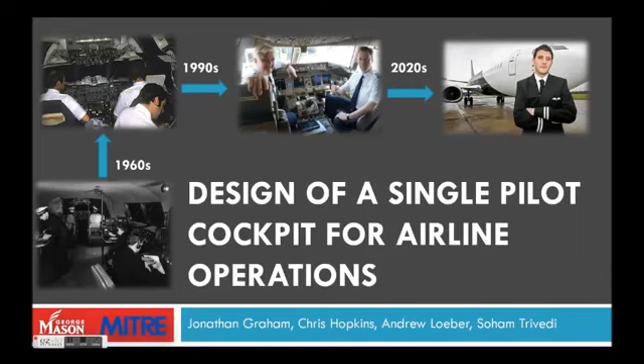I will be doing a quick little overview of our senior capstone project, which is the design of a single pilot cockpit for airline operations. My teammates were Chris Hopkins, Andrew Loeber, and Soham Trivedi.

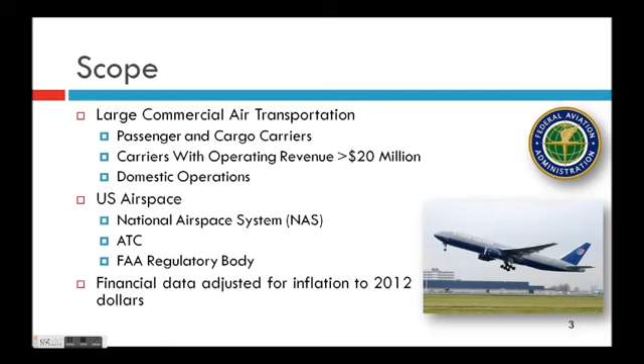So start off with some context. Our scope that we're looking at for this research is large commercial air transportation, which we take from how the Bureau of Transportation Statistics defines it: carriers that have more than $20 million in operating revenue, and domestic operations, so it's the U.S. airspace, and we inflation adjust all of our dollar figures to 2012 dollars.

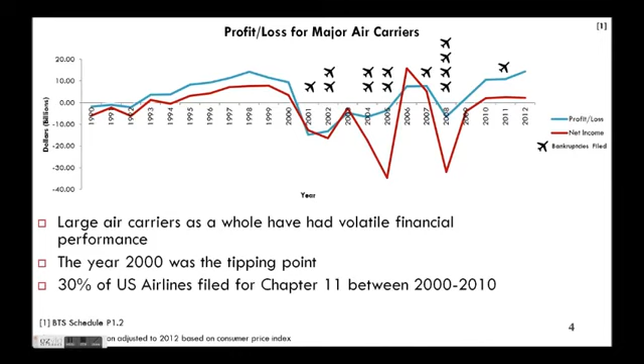So this graph here shows our profit and loss for major carriers. Notice that up until about 2000, they were somewhat profitable, and then there's this period of bankruptcies and really up and down in profit and loss and net income. So overall, pretty unstable during this most recent period.

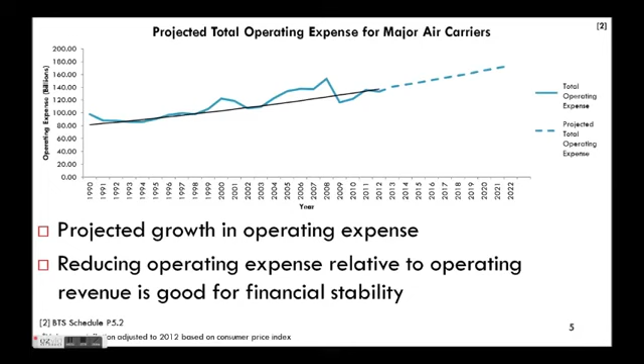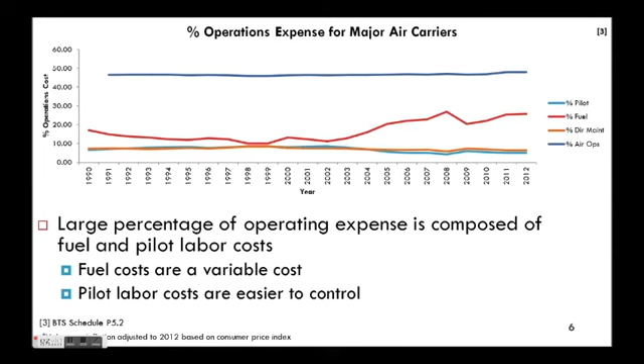And when you look at the operating expense, it's steadily rising here over the period 1990 to 2012, and then projected to keep going. And of that operating expense, fuel really was the driver over the last decade. For our purposes, we're saying that fuel costs are definitely more challenging to control than something like labor. So we are going to focus on labor. And pilot labor, though steady, was still a pretty large portion of that $100 billion or so operating expense.

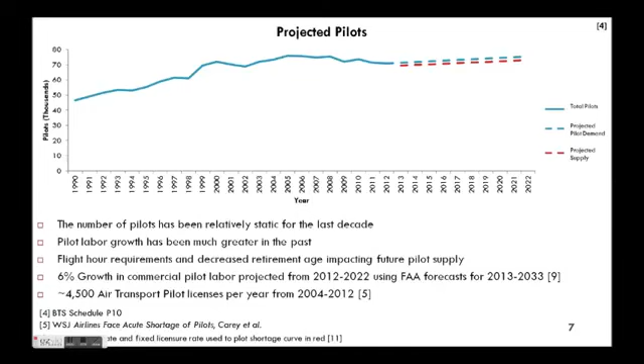In addition to that cost figure is the fact that, according to FAA and some other reporting, there's an expected pilot shortage in this commercial area. So you're having cost issues, and you also might have a pilot shortage, so that drives looking at a single pilot cockpit.

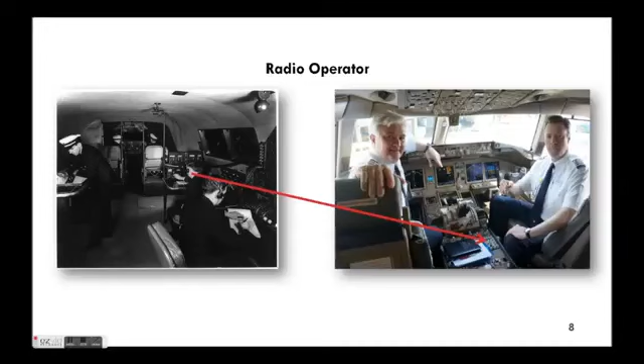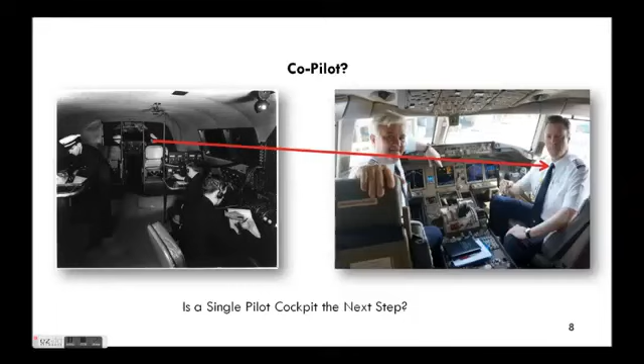Now on this slide, an interesting historical note is the historical evolution. So on the left, you start with 5 pilots, and then over time, certain technologies eliminate the need for a pilot. So the radio operator goes, and then the navigator, the flight engineer, and now we're going to say, can we get rid of a co-pilot? Is there some technology, or is the safety of the aircraft good enough, or whatever the case is, where you can have a single pilot?

So our focus is going to be on the flight deck, and we isolate the 2 roles of these 2 pilots, where you have a pilot flying and a pilot not flying, also as a captain and a co-pilot. Though pilot flying and pilot not flying are interchangeable, they're not static. And in general, due to flight requirements for certification by the FAA, you have to really balance these 2 roles between the co-pilot and captain. Otherwise, no one would ever really get trained.

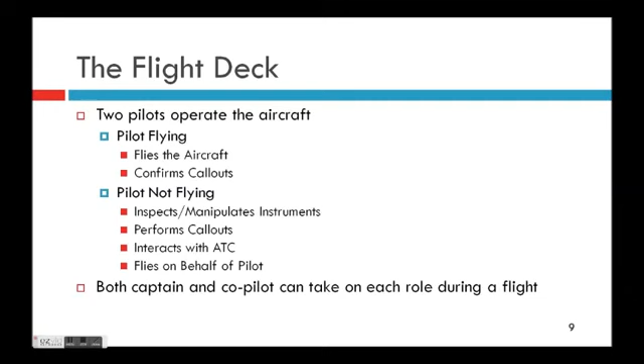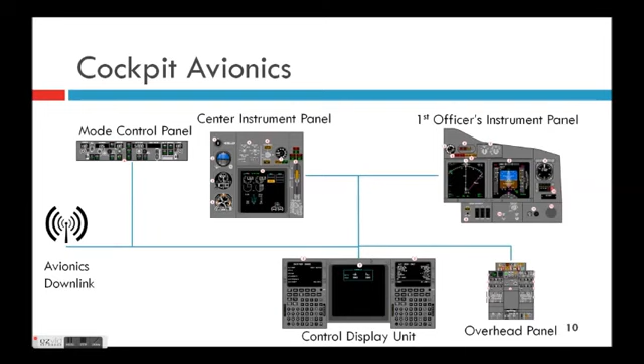Also to note, yes, there are more than 2 pilots in certain aircraft. Usually, that's the international flights, the larger planes where you actually have to have a rotating crew. That's out of our scope. Again, we're in the U.S. airspace. Looking at some of the cockpit avionics that are common, these are some of the technologies that eliminate the need for certain pilots.

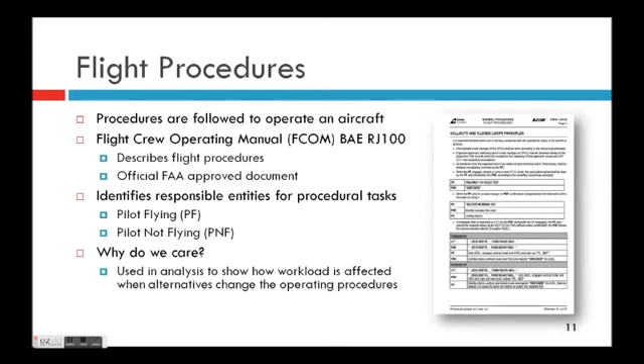And what's governing these pilots in the cockpit are the flight procedures. For our purposes, we were able to obtain a BAE RJ100 flight crew operating manual, which has a section that tells all the standard operating procedures that a pilot flying and a pilot not flying are supposed to do. And for our analysis, we're going to look at how workload is affected whenever these procedures change under different system designs.

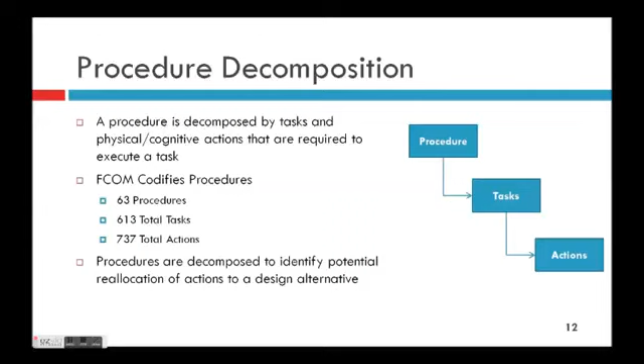So a procedure, as defined in that operating manual, is broken up into 63 different distinct procedures, and those are normal and abnormal procedures, which are then decomposed into 613 tasks, which we decompose further into specific actions, which characterize physical and mental actions that are required to accomplish that hierarchy of procedure tasks.

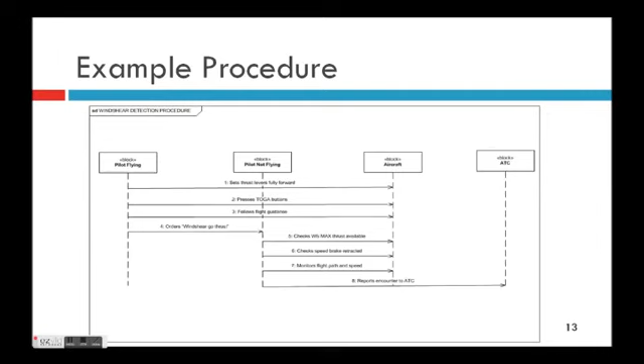So these terms I'm using, the instrument manipulation, cockpit call out, these are our ontology that was developed to characterize these actions, so the lowest level interaction in the cockpit for our purposes.

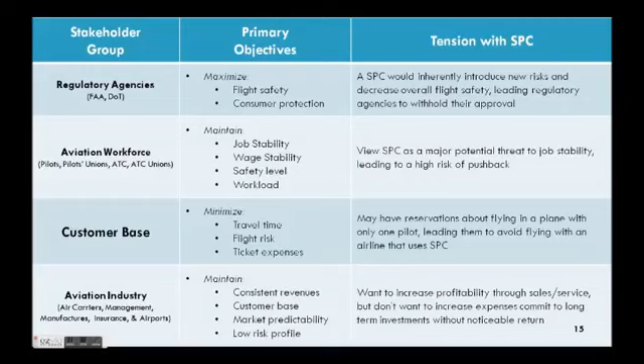So going on in the stakeholder analysis, we've kind of grouped some of these various high-level stakeholder groups. So you have regulatory agencies like the FAA, the aviation workforce, so pilot unions, air traffic control, their unions, the customer base, and then the aviation industry as a whole. So air carriers, the management of those air carriers, or airliners, if you will, manufacturers of the aircraft, insurance, airports, etc. And this nice graphic here to kind of describe some of those tensions that you have.

So regulatory agencies would be pretty hesitant to transition such a large overhaul in the air system to go from these 2-3 pilot cockpits down to 1. And then pilots, of course, would be a little miffed at first because you might have issues with perceived job threats, things like that. But again, there's a pilot shortage, so there might be win-win there. Pilot unions, ALPA, the air traffic controllers, and their unions. Again, these kind of labor groups resistant to change.

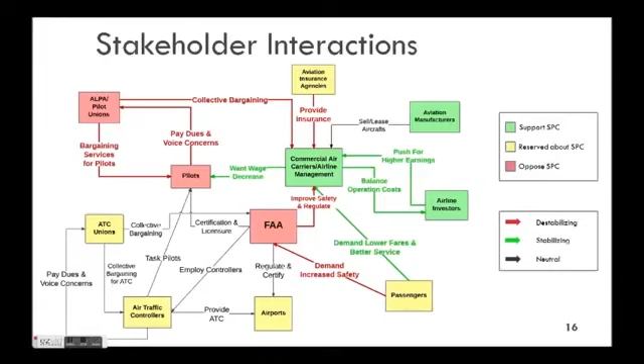Your commercial air carriers, airline management, and your aviation industry overall might be willing to support something like a single pilot cockpit due to the potential market benefits for reduced cost, increased sales for planes, things of that nature. Of course, there is a risk profile associated with that, so you got to get regulatory and of course insurance companies, things like that on board too. So a lot of tensions going on, but that will be addressed later with a win-win.

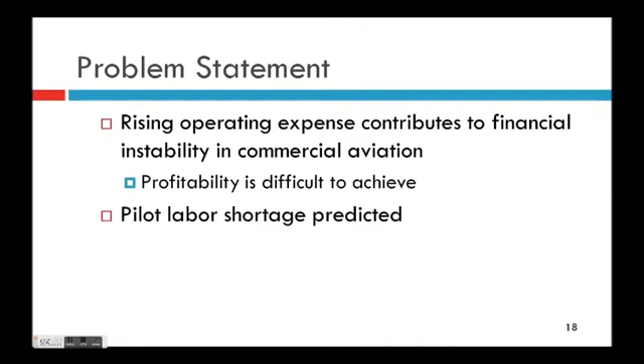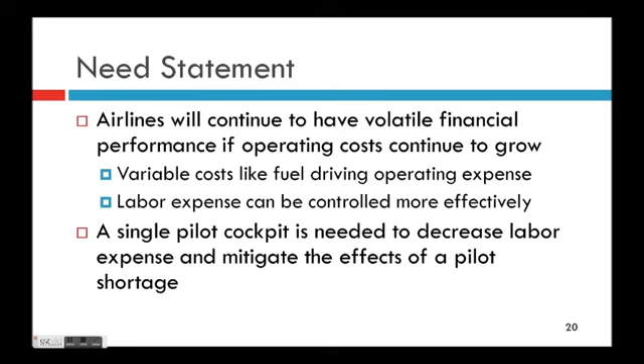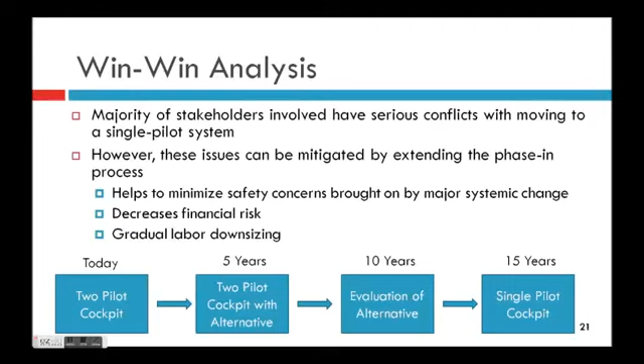So there's a lot ahead of you with trying to satisfy all these different stakeholders, and a win-win could possibly be the actual phase-in of this technology versus just like a light switch, you go from 2 to 1. So notionally here we have a 2-pilot cockpit as we have today, and then within 5 years you have some sort of 2-pilot cockpit with your alternative. So you keep those 2 pilots there to evaluate it, and you keep evaluating, testing, refining, so very iterative, and then you eventually transition to a single pilot cockpit. So this gives you a lot of time to analyze and satisfy a lot of these issues that these stakeholders would have.

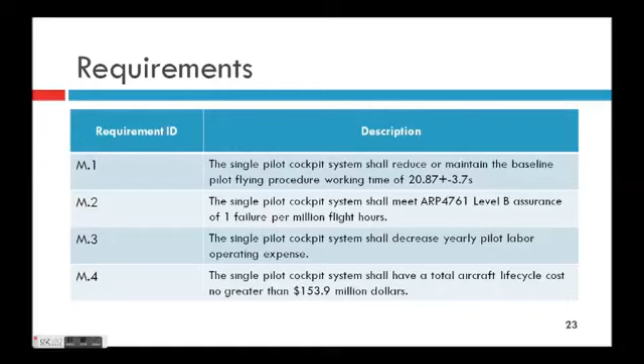Some high-level mission requirements we've developed were for the procedure time, so we're going to put a boundary on their baseline procedure time. Reliability requirements and costs, so you're concerned about safety, and then these values come from our analysis, which will be described further later. So into the design alternatives, first we'll start with the physical process diagram.

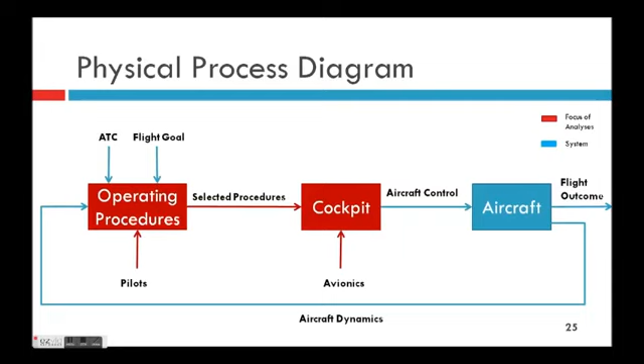This is kind of where we branch our design alternatives from. And we start with operating procedures, which have pilots that are kind of triggering these, or not triggering, these are mechanisms for the triggered flight goal and air traffic control. So they're receiving commands and they're trying to hit a target goal, and they're selecting these procedures and implementing them within the cockpit, which are your avionics, and then they're issuing aircraft control to the actual aircraft. And you obtain your outcome, or you have that feedback loop with that aircraft dynamics, and you just keep doing this. So again, it's kind of a steady state here.

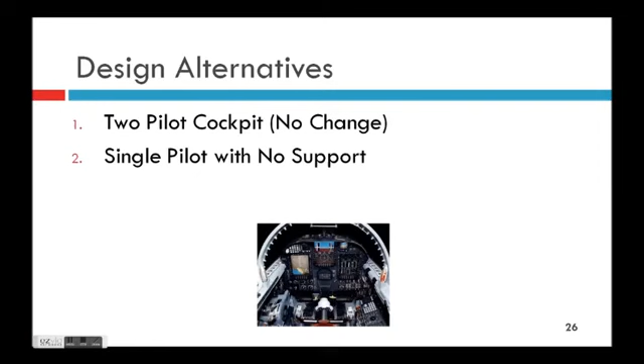In our design alternatives, we'll have basic 2-pilot, so this is the no change option. We just keep everything the way it is. Single pilot with no support, so it's just a lone guy flying. That's a picture of a U-2 cockpit, so very common in the military, but we'd be trying to do this

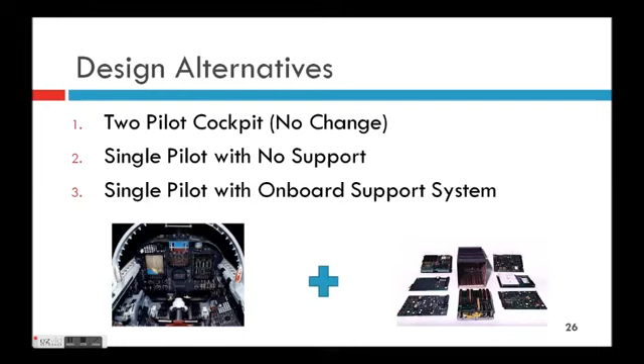for commercial. And then a single pilot with onboard support system, so that is that single pilot who's flying, but he has some sort of avionics hardware. Black box at this level, but it's there and it has some basic functionality that can handle some of the workload that the co-pilot would have, or the pilot not flying would have.

And there's three different models that were generated for each alternative. So one for the two pilot, which is basically the manual. And then there were some rules of thumb developed to change how we eliminated some of the procedures for the single pilot case and the single pilot with onboard support system.

And that gets pumped into a Java simulation program, which underneath has a model human processor, which is a queue network of different processing nodes that basically those actions all the way at the lowest level of our model get processed through, which I'll explain more in detail later.

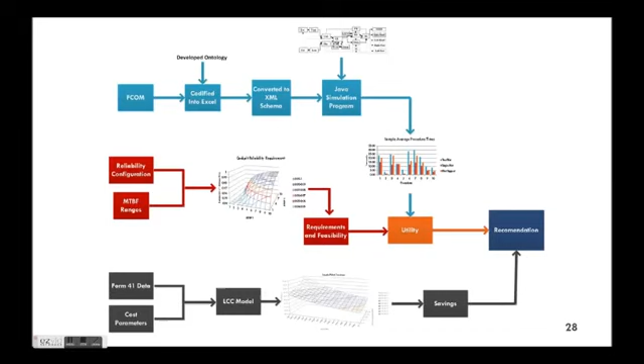And those two inputs get combined into a utility, which will use a lifecycle cost model to develop the savings potential for the alternatives, and then eventually drive for a recommendation.

So start with the procedure simulation, a lot of assumptions here. We start with the model human processor. This is going to approximate our actions in the cockpit under normal flight conditions. So this is best case scenario, no pilot that's fatigued, or he has something on his mind, or whatever, he's in optimal condition. The events are independent of each other, so they're not related in any way. If there's an issue with one, it's not going to carry over to the other.

Normal flight conditions and expert skill level. Presumably pilots have to be experts to fly at a commercial level. They have a lot of flight experience and they have to be certified. And we assume the alternatives follow contemporary avionics costs. So for that onboard support system, it's not going to be absurdly expensive. It should be relative to a similar system of similar complexity.

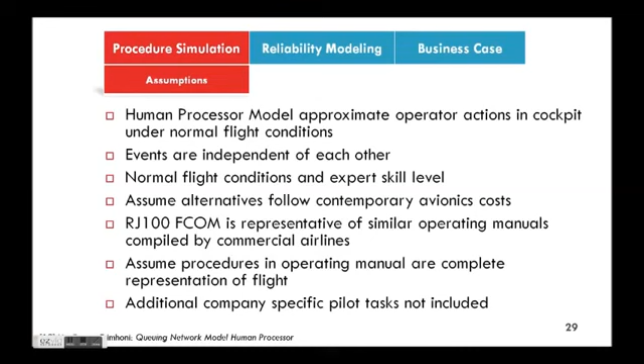The RJ100 is representative of similar operating manuals. Of course, not all of them are the same. If you have a 737 or 757, they're going to be different, but we're going to say that this approximates most of them. And the procedures in these manuals are a complete representation of normal flight. Additional company-specific pilot tasks, which are very common, are not included in the manual, and therefore are not included in the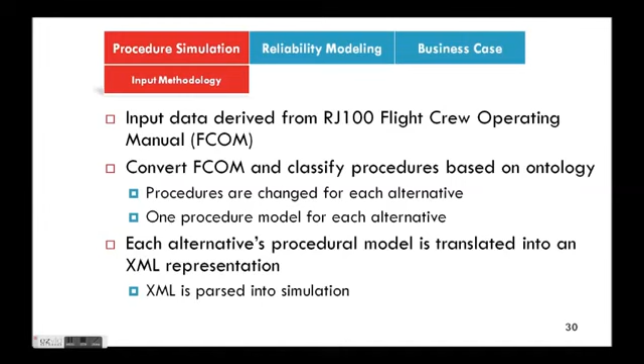analysis. So for inputs, again, driving the point home, we started with that standardized operating manual and then broke it down into this XML model, which gets parsed into the simulation and is processed according to the model human processor, which is a high-level network broken into perception, cognition, and motor, with a lot of sub-network pieces below that that make up some of the ins and outs of each of those higher levels.

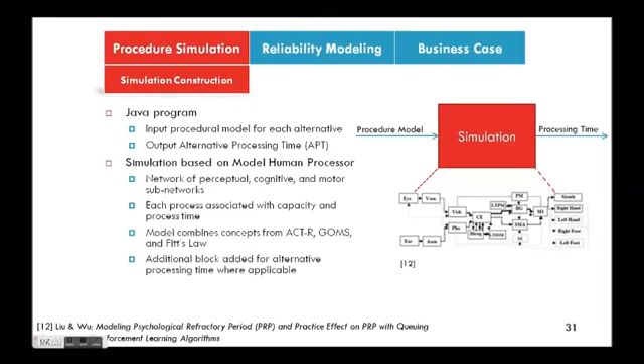So it's grounded in a lot of human factors research. If you're familiar with this area, like ACT-R, GOMS, Fitts' law, a lot of these pieces are placed in there. And we add our own block for a processing time for avionics. And this is just a little mini animation.

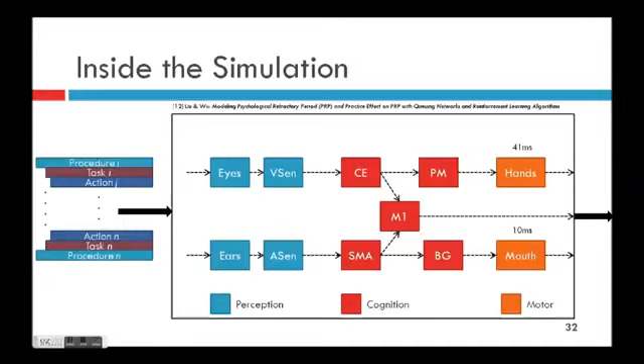So over on the left, you have that tree. That would be the XML. An action comes in and gets processed by the perception, then goes through cognition, and then hits the motor if applicable, for instance, if he's playing with an instrument. And these get summed up, and you'll get an actual processing time for that action, and those actions get summed up to the tasks, and eventually you'll get an actual procedure time.

And these are the equations that are used, so some of various distributions for various sub-network nodes. And then these are just summed up in a Monte Carlo-like fashion, and you'll get a processing time for each procedure.

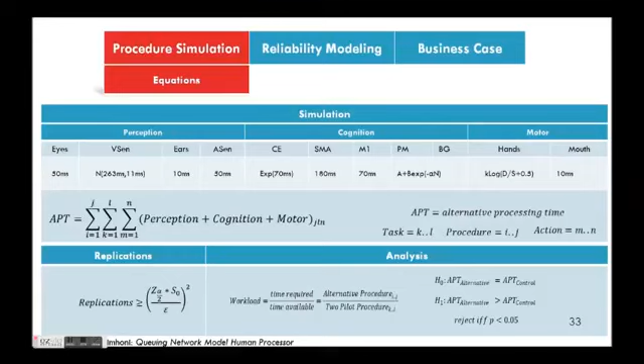And for analysis, we're going to look at if there is a statistical difference in our two-pilot case, and then what's the workload. So workload is a ratio for the procedure, so discrete individual procedure time compared to the two-pilot procedure time. So if it's greater than 1, then it took more time for a single pilot to fly than the two-pilot to fly.

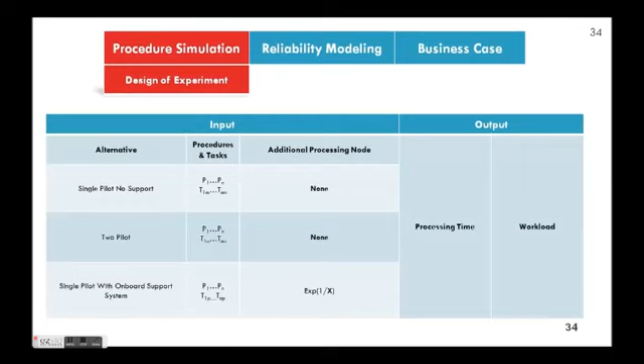In the design of experiment, we have our input, which again are those 3 different models which have different tasks. They're manipulated based on the capabilities of each design alternative. We add an additional processing node for the onboard support system, and then our output will be workload and processing time.

Queuing over to reliability modeling, we looked at what is the baseline safety in the airspace system now. NTSB puts out some data, and based on that, there's about 2.2 accidents a year on average from the 1993 to 2012 time period, with an average of 14 million or so flight hours a year.

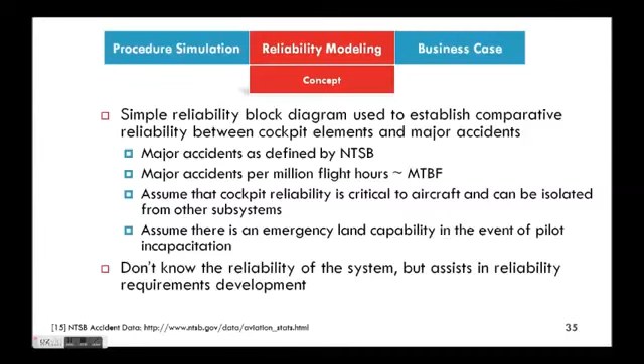And we treat that as a failure rate, so 2.2 on average, 2.2 divided by 14, and you'll get your failure rate, and then we'll convert that to a per hour basis, and then use that in reliability block diagrams to see what happens for basically your space of allowable failure.

So what can you certify to meet a certain reliability requirement, which I might have skipped over in the previous slide, but at 1 million flight hours, which we fix in our analysis, is 0.8674. So there's an 86% chance you can continue flying at 1 million flight hours without actually having an accident in the airspace system. And a major accident is defined as a loss of life or a catastrophic loss of the aircraft hull.

So on the left-hand side, you have a two-pilot cockpit, and in parallel, you have a pilot and a co-pilot. If one is incapacitated, the other can continue to fly the aircraft. And the aircraft is, of course, whatever its piece is in serial with that cockpit. The single pilot, though, if he goes, then it all goes. So it's a serial reliability.

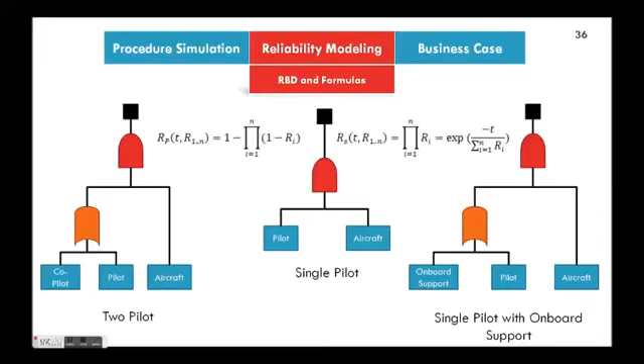The onboard support system, we're going to say that it has a functionality or capability where it can actually support a pilot incapacitation event where there's either a ground trigger or another person on the plane can trigger an emergency auto land or auto transition effect. Again, really high level assumption, but we don't think it's out of the scope of possibility given the current UAS capability with a lot of the military hardware and even civilian hardware at this point.

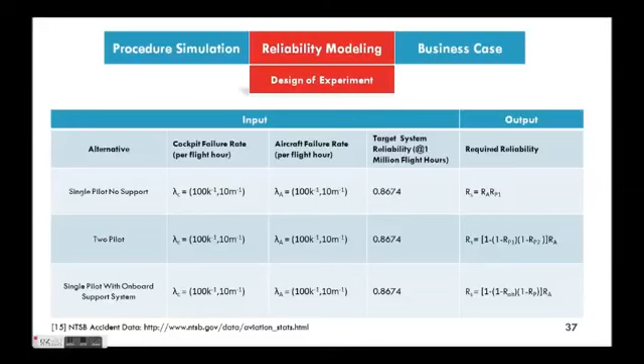So design of experiment, we basically varied the failure rates from 1 in 100,000 to 1 in 10 million hours. You have a catastrophic failure in one of these components, and then see where you have to be to meet that 0.8674 system reliability and system rating as the airspace system. So we're not talking to individual aircraft here, we're talking over your entire system. What are you dealing with? And then the output, those are your output equations.

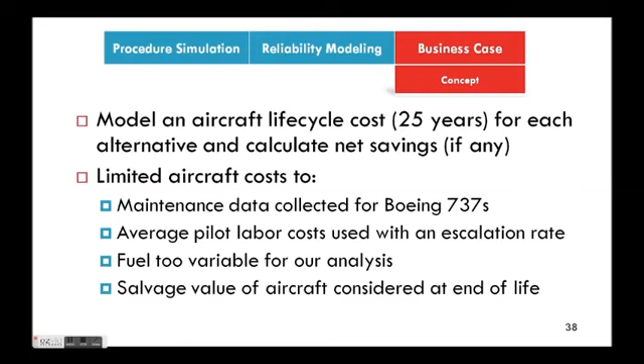In the business case, we developed a life cycle cost model for 25 years. We looked at data for the 737 out of Form 41 filings from the Department of Transportation, and used the average pilot labor cost, and so basically a starting acquisition, a salvage at 25% of the acquisition, which really isn't too important because we're really looking at the pilot labor and what happens when you remove a pilot.

So what is your life cycle savings? So you have a life cycle cost, and then you have a net savings. So the savings would be the difference between the two-pilot case and the one-pilot case. And basically whatever you save over that life cycle, you'll have to invest in other areas or into that other alternative, the onboard support system, on a per aircraft basis.

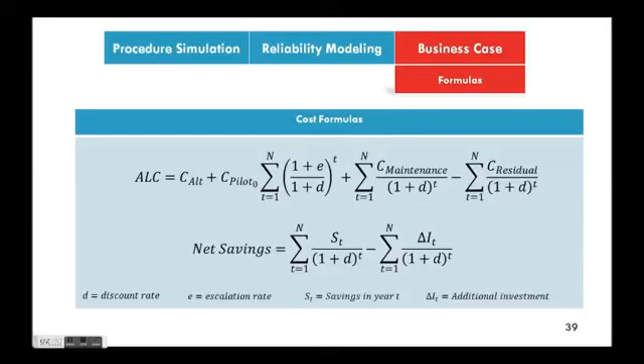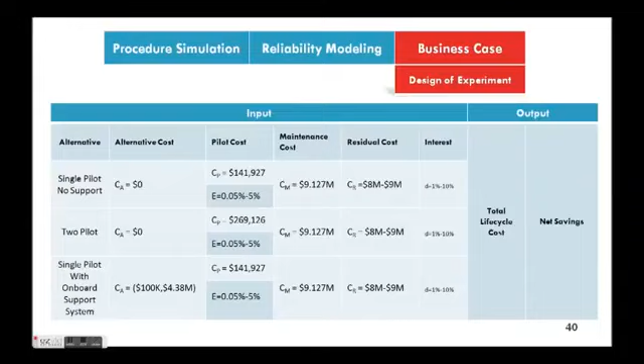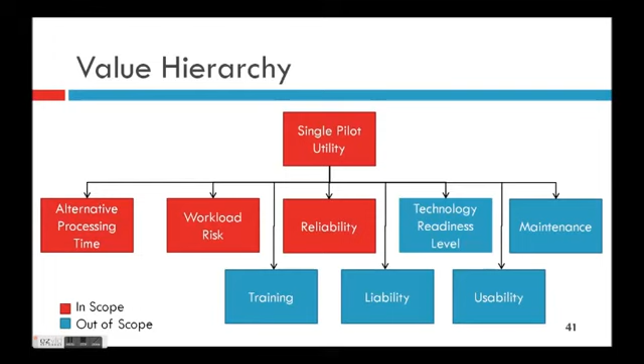The two pilot obviously had longer times because there was more interaction. The cockpit took more actions to complete before you could complete a procedure. Single pilot had less because you're actually eliminating a lot of the time with interacting with another pilot and kind of the back and forth there. And the pilot support was kind of close in most cases, but usually came in second with regard to least time, two pilot most time. But both had a significant difference.

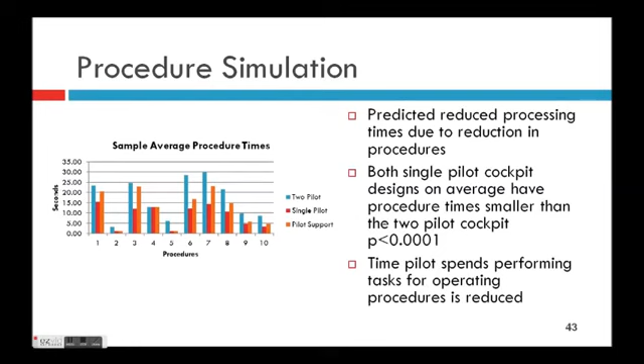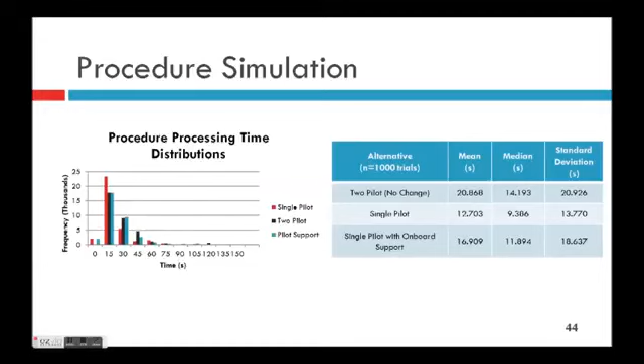P basically 0. And the takeaway is the time the pilot spends performing tasks decreases because as predicted, you would eliminate tasks from that procedure tree, then you'll have less time. No distributions can be fitted to this; this is a histogram here of the procedure times, but there's some sample statistics there, so you have mean, median, standard deviation. As for the workload, single pilot was significantly higher, about 4.17, compared to the onboard support system, which actually had reduced workload per our analysis.

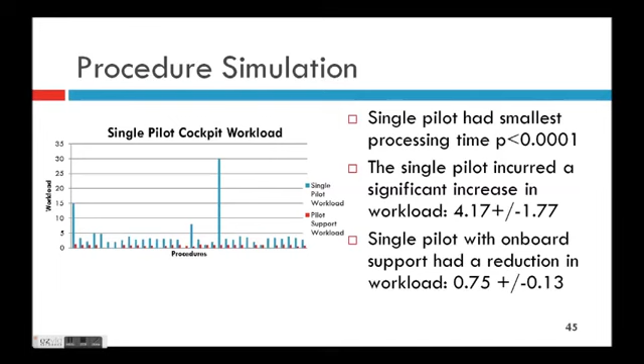So the takeaway here is that you have an increased workload on the single pilot. So he's working faster, but he's working harder. So there's some implications there where your error rate might peak and his exhaustion might start going up. So a lot of human factors implications there, which would require further analysis with live subjects.

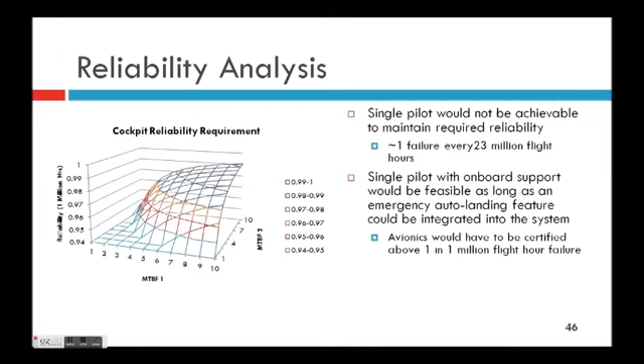When the reliability we looked at, you'd have to have one failure in every 23 million flight hours for the single pilot case, which doesn't really work with the current flight safety, so we deem that as infeasible. If you can certify your avionics to a reasonable one in a million plus failure rate, then you should be good when you have a pilot flying with it. So we judge that as being feasible.

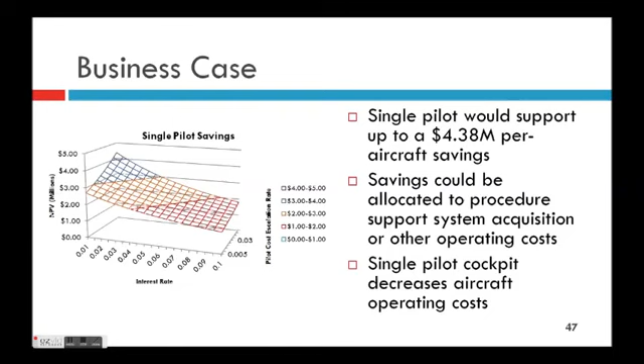The single pilot savings, best case, you'd have $4.38 million per aircraft, which you could invest or allocate to other areas. And worst case, you would have 100K. So that's really a business decision. This should be extended further on a per airline basis, and you can add in deeper research, such as maybe efficiencies in fuel or maintenance, things like that. But for now, this is just high level, best, worst. Not too bad.

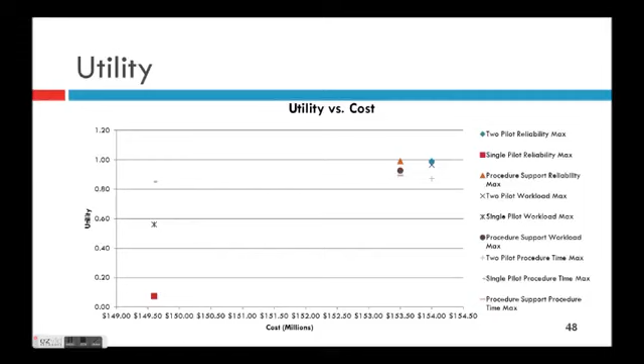Utility we looked at, instead of going in and doing surveys and things like that, just starting with sensitivity analysis, where if you max each attribute, where do you end up for the alternatives? And really you never do well with the single pilot unless you look at procedure time, which even then it's marginally better in terms of value. So for the most part, you're going to win with the two pilot and the single pilot with onboard support, and the onboard support would potentially have savings. So we'll get into that with recommendations.

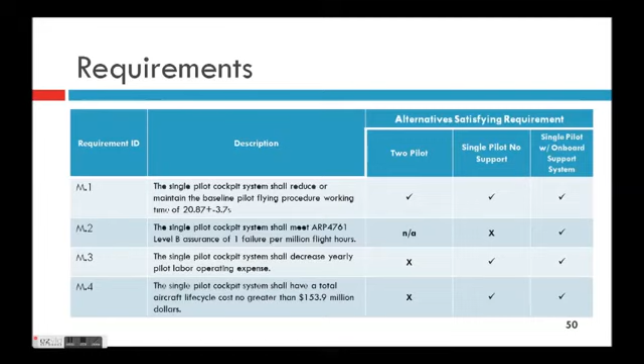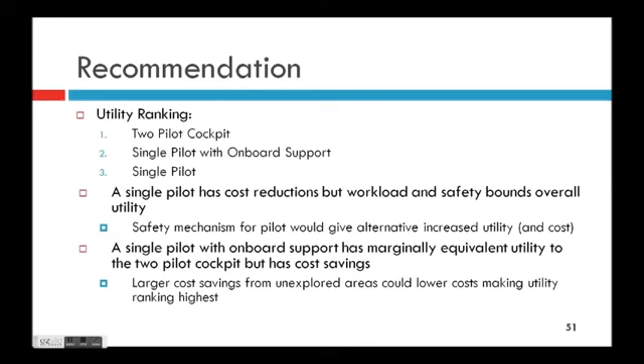So with requirements that we had at the beginning, we satisfy them with the onboard support system, and we don't with the single because of the safety implications, the reliability. For a recommendation, our utility ranking, we have the two pilot, then the single pilot onboard, and single pilot. The single pilot has cost reductions, but the workload and safety bound the utility there, and a safety mechanism for the pilot would give the alternative increased utility if you actually add that in, which is basically our onboard support system. So we would recommend to go forward with using the single pilot with an onboard support system.

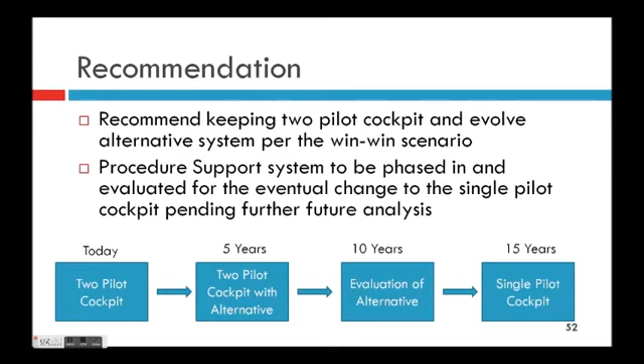And here comes back that win-win. If you can evolve that design and integration in over that win-win period, it could be a success for regulatory body, consumer, labor, all those stakeholders.

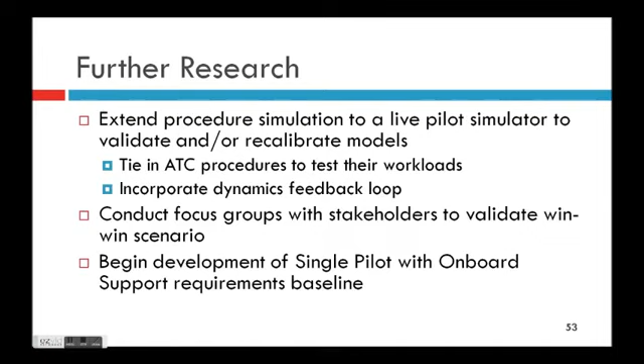So of course, this is very infant research, and it'd be good to actually tie this into a live simulator and see a lot of those human factor implications, and work this over with stakeholders and see what they actually think about the idea of flying with one pilot, and start actually working on an onboard support design, so not just treating it as a black box, but design a requirements baseline that you can flow down and start designing hardware and seeing if you can realize cost savings or do some of these assumed failover capabilities. And thank you.